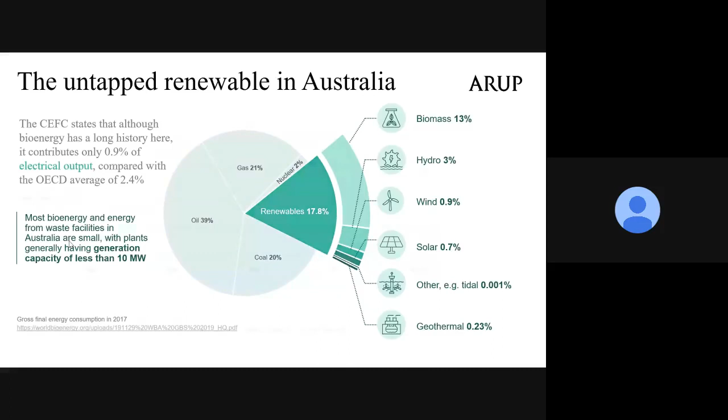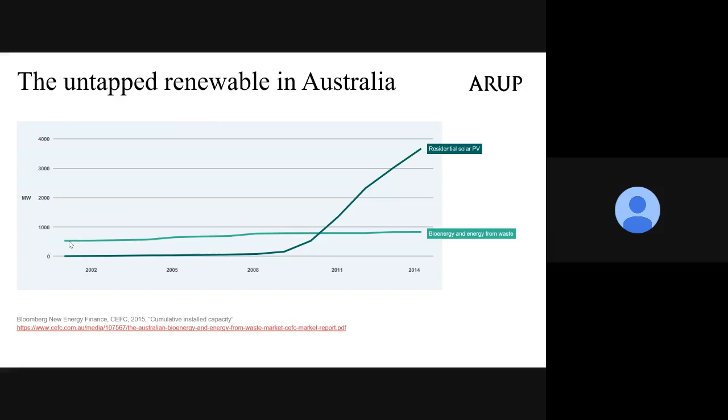It's interesting to note that the size and scale of bioenergy plants typically has been smaller in the Australian market, though there are some bigger ones coming up, which is quite exciting. If we look at bioenergy and energy from waste and compare it to solar PV, we can see solar's been on an amazing upward trajectory since around 2009, whereas bioenergy has been a very slow growing market in Australia, and there's a lot of opportunity for us to step into this untapped renewable.

Globally, we're seeing a lot of work, a lot of growth around the market. In 2017, for example, bioenergy accounted for 70% of the renewable energy consumption overseas. When we look at these countries and the size of bioenergy being produced for electricity, it's significant. And not only that, but that bioenergy is also being used for biomethane that's getting injected into the gas networks.

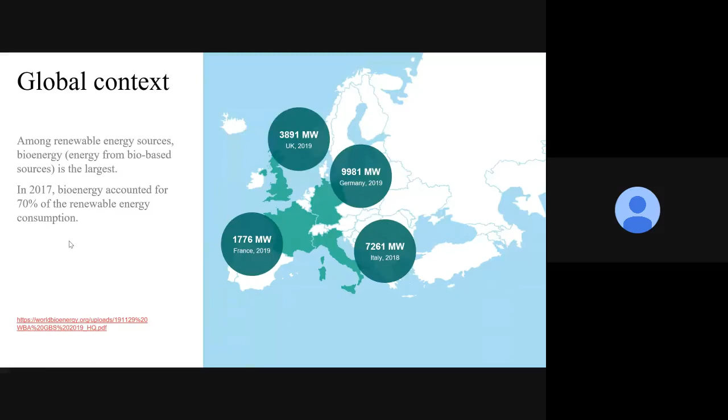Across Europe, there's over 1,000 operational plants operating in that way. I was going to touch a bit on the Italian market, but I'm sure our friend Kunal, who's speaking a bit later, will talk about some examples from Anaergia and work happening there. There's a lot of lessons we can learn from what's happening overseas, and there's a mature market, mature technologies, and we can tap into that to accelerate the growth of this market in Australia.

The second area globally I wanted to touch on was California, and there's a significant market being unlocked there, with a number of initiatives used to help unlock that. They're both federal and state incentives under two separate programs. The first is the Renewable Fuel Standard, which requires specific volumetric renewable fuel goals for the US. Secondly, the Low Carbon Fuel Standard, the LCFS. In California, they intend to reduce greenhouse gas impact of transportation fuels.

If you look at the size of the market and what's happening with bioenergy globally, there's 11 million people employed in the renewable energy industry, and bioenergy is the second largest employer of people globally. So globally, we're seeing bioenergy really take off, and I believe we're on the precipice of seeing that happen in the Australian market as well.

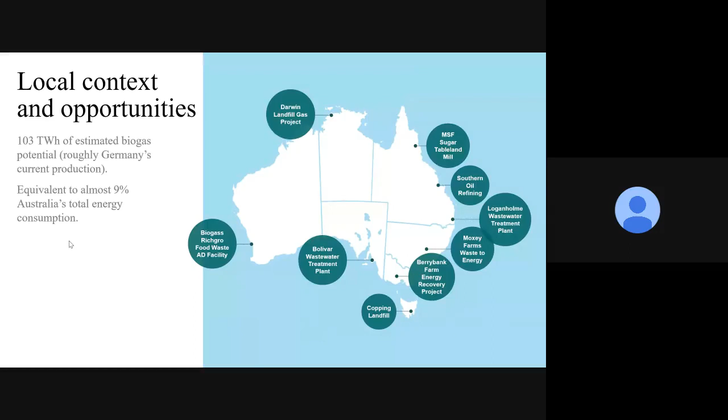In Australia, there's an estimated huge potential for biogas, roughly equivalent to Germany's current production, and Germany being one of the leaders in that space. There's a lot of different types of examples we can learn from around the Australian market. Obviously today we're focusing more on the water industry and applications in the water space, and you can see a couple of examples around Loganholme, Bolivar, for example. Fundamentally, that estimated opportunity is equivalent to almost 9% of Australia's total energy consumption.

I touched on what's happening globally before around not just bioenergy, but the gas opportunity. I wanted to highlight the fact that when we think about the water sector, there's the waste energy opportunity from our wastewater treatment plants. But I wanted to encourage all of us to continue to think holistically about cities and how do we bring together some of these opportunities.

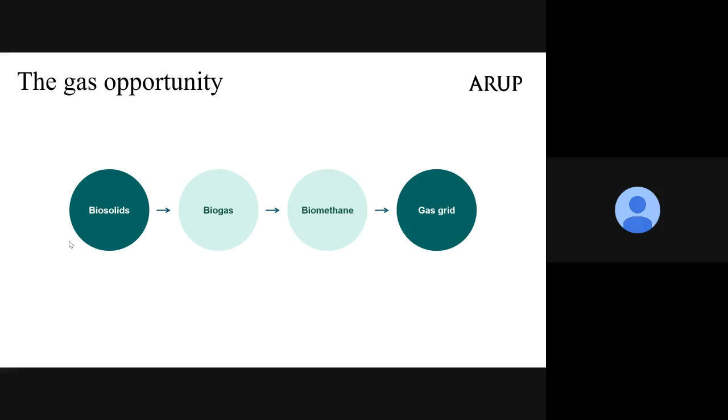In Sydney, for example, we have Sydney Water with significant scale of wastewater treatment plants. But then we've got Jemena with a gas network actively looking for players who can provide gas into their grid. As this quote from Jemena says, the Jemena gas network can act like a giant battery and bring renewable gas to more than 1.4 million customers for cooking, heating and hot water. So there's an opportunity for us as a water sector to collaborate with other utilities to capture this opportunity.

Not only that, but when we think about waste, it's not just about waste from the wastewater treatment plants, but there is a huge food waste problem in Australia, estimated to cost the Australian economy about 20 billion a year. You can see some stats around the volumes, but fundamentally 7.3 million tonnes of food wasted every year. Now imagine we worked as a water industry with the waste sector, with the electricity and gas sector, to look at how we bring together more of a circular economy approach to what we're doing.

Now, I'll touch on that a little bit later, but not only are we seeing this convergence of water, energy and waste, but we're also seeing an increased appetite from investors around the market. You can see many of the people who've dialed into the call today are investors. It's not just what can we do as a water sector, but it's how can we partner.

And there's been a real focus on responsible investment approaches, looking at social, environmental value and risk in terms of investments moving forward. Not only that, but Australian investors aren't just looking at the Australian market, they're looking globally. One of the examples Kunal will touch on, Rialto in California, was a collaboration with FSI, an Australian investor. So they're looking overseas and they want to invest into the bioenergy space in Australia too.

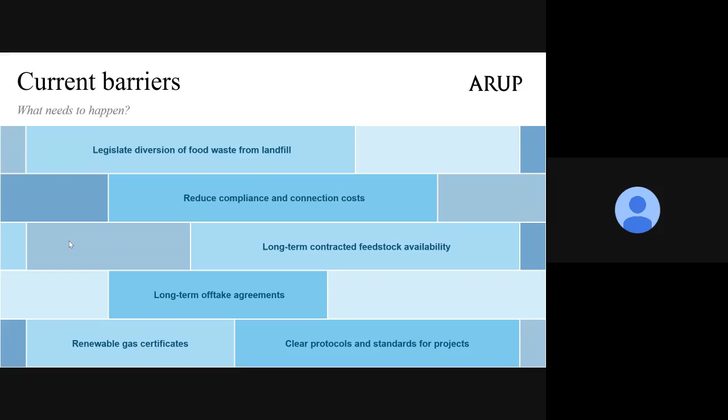So, current barriers - and some of this will be alluded to by our other presenters, so I won't harp on this for too long - but we're seeing the bioenergy roadmap unfold at the moment, and many of you will have contributed to that. But there's a number of barriers and lessons learned that we can apply from what's happening in California and Europe, to actually try and change legislation and regulation to complement changing thinking in the water sector in terms of partnering.

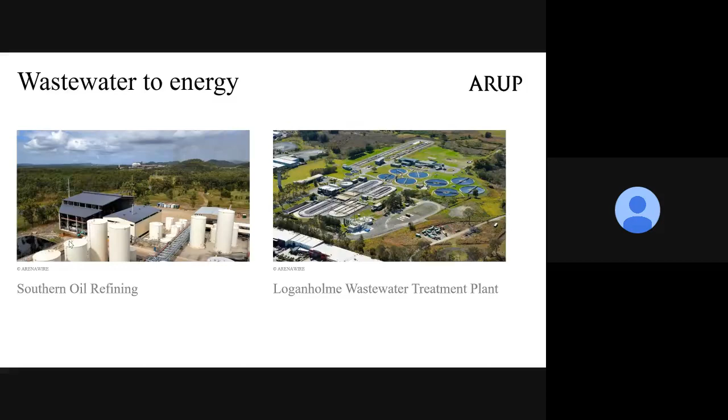We've got lots of talks on different projects today, so I'm not going to focus on these too much. What I will say is there's been some really significant movement in bioenergy in the industrial space, and I include water in that thinking. We've seen some fascinating work around capturing wastewater in lagoons and using that gas. But we still haven't really seen the market take off in the municipal sector, and I think that's going to be the next frontier over the next 1 to 3 years.

The size of the Australian water sector is significant, as you know. There's assets that we have, particularly when we look at wastewater, that's where a lot of the opportunity is to partner and use our wastewater assets more effectively, but also to partner with the gas networks and the waste sector.

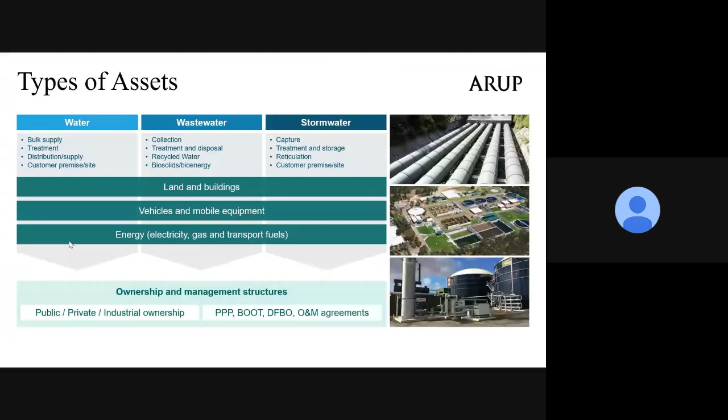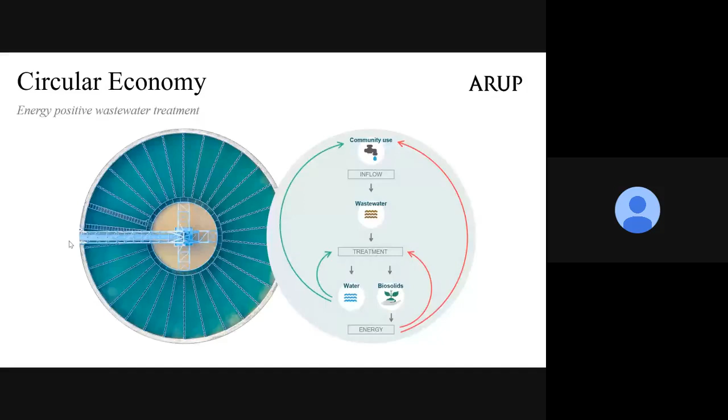So when we talk about that circular economy approach, we can think about bioenergy as energy positive wastewater treatment. ARUP's been doing some really interesting work with the Ellen MacArthur Foundation - if you haven't had a chance to look at it, those reports are available publicly on their website - around circular economy thinking. As part of that, we've been exploring how water can join that circular economy approach, how we can shift habits we've had in terms of how we run our sector, and how we operate in silos to an extent. In the past we've looked at gas separately, electricity separately, water and waste separately, and how do we think more holistically and capture that opportunity by thinking about the overall impact and opportunity we can have in cities.

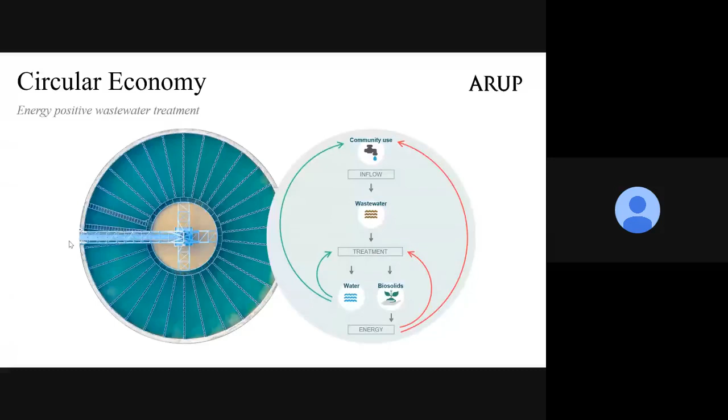When we look at that opportunity, there is a real synergy between what we do with our water and wastewater management systems and circular economy initiatives. And I think that's what I wanted to highlight today as we go through these presentations - to just think about what role we can play in responding to the environmental challenges we face within Australia, and how we can be part of the solution.

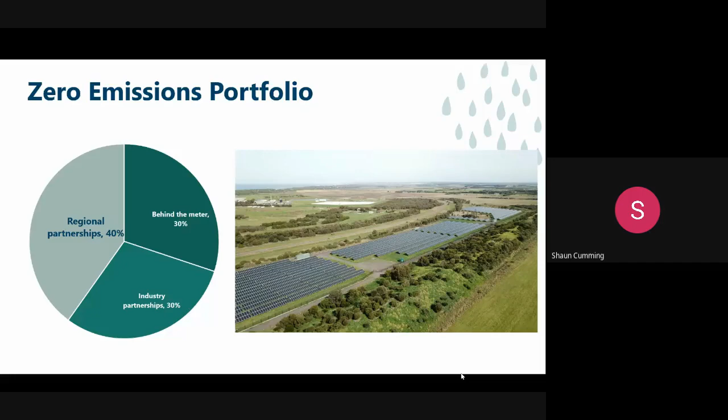And in doing so, we really tapped into the challenges that we're facing, our partner councils are facing, and also our major industrial trade waste customers are facing as well. And what we identified was 3 key themes that we were all facing.

So the first one was around addressing climate change by reducing emissions. The water industry is one of the largest emitters in the state government's profile in Victoria, and that's because water is heavy to move around and energy intensive to treat.

Councils: 34% of the general waste bin that everyone puts out each week is food organics. And when that breaks down in landfills, it emits methane, which is 25 times more potent than carbon dioxide in terms of a greenhouse gas.

In terms of our waste challenges, our population is increasing significantly in our region, and our waste is increasing at a rate greater than our population. Our landfills are filling, and waste security was a big challenge for industry as well, in terms of knowing long-term sustainable waste management solutions and also knowing the costs of those.

Energy and waste costs are also a big challenge in terms of maintaining affordable water bills, maintaining affordable rates, and we found it's impacting the global competitiveness of industries in our region. Landfill costs will more than double over the next 3 years, and over the last 5 years, gas and electricity costs have doubled. So that's really impacting the ability to compete on a global scale.

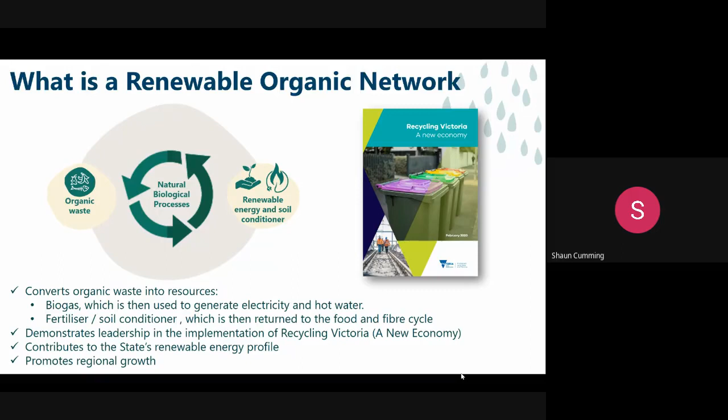And so with that in mind, our first Renewable Organics Network is actually underway in Colac. This is a partnership with Australian Lamb Company and Bulla Dairy Foods. So if you've eaten lamb from Coles, you've eaten lamb from the Australian Lamb Company, and they supply lamb to over 69 countries around the world. And I'm sure a lot of us have had a Bulla ice cream as well.

And what we've done is flipped our mindset on its head. We used to say to these customers, take out as much waste as you can and then send us the rest and we'll treat it. What we've said instead is: we'll provide a full waste solution for you, and while we do that, we'll create both energy and soil enhancer products. So they send their high strength waste to the Colac Water Reclamation Plant, where we create biogas that actually takes our plant completely off the grid and puts electricity back into the grid.

It also provides hot water back across the road to the Australian Lamb Company. The Australian Lamb Company currently use gas to heat up water for washdowns and the likes. This essentially offsets their gas use.

And it's a double loop, so the other thing is the solids that are left over get integrated into our biosolids facility, which thermally stabilises the solids and produces pellets that are reused around Australia - New South Wales, Victoria, South Australia, and even shipped across to Tasmania. That's gone from a product we used to have to store and try to find a home for, to a product now that we don't have any storage for. It's supplied to farms year round.

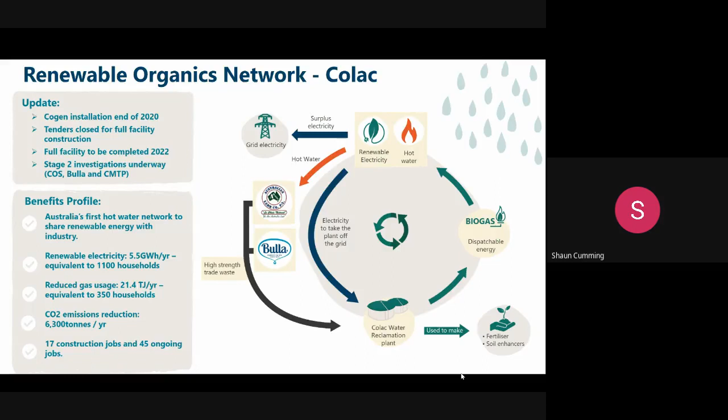And with that in place, we've now turned our minds to a regional-based initiative that's really partnering with the 6 councils within our region - being Wyndham, City of Geelong, Golden Plains, Surf Coast Shire and Colac Otway Shire - and looking at servicing a population of about 600,000 when you combine all those councils.

And we've looked at the waste in our region. There's about 150,000 tonnes a year of organic waste generated in our region, and a large percentage of that goes to landfill, which is an awesome opportunity to really upcycle that and create benefit from it.

So again, this facility is creating that double loop, like I mentioned before, with a strong focus on energy. But I think in this one, we're actually doing a lot of work looking at the soil enhancer, soil fertiliser opportunities, and how we really create a product that's differentiated as everyone moves towards a circular economy, and really has an edge against just normal compost.

We're looking at some innovative forms of that product, and also innovative sustainable additives to create what I call the super juice for all the farmers in our region.

This is under development at the moment. We're going through a 3-phase development process. We've identified all the waste in our region, looked at over 20 different combinations of opportunities, and we're narrowing in now on a preferred opportunity. We'll come to an idea of what the preferred process is by the end of this month, then move forward to taking that to a business case by the end of December. As we do that, there are a couple of things that are really beneficial to everyone working in this space.

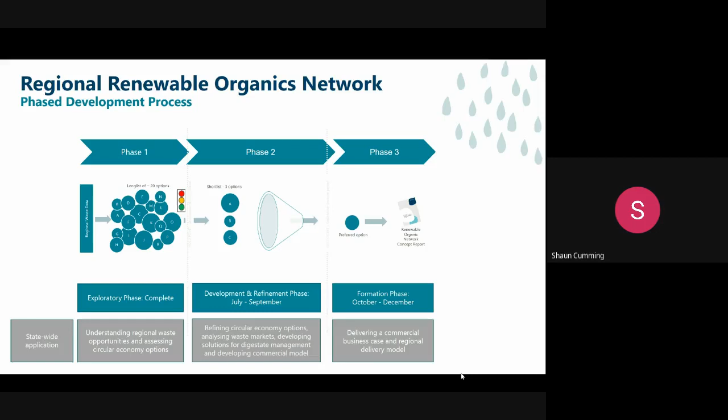We're doing a lot of work understanding what the gate fee market is doing. There's a lot of different drivers in terms of gate fee markets going forward, and it's one of the key areas that all of our partners are looking for some sort of idea or certainty on, to assess what value for money is in this space. We're doing a fair bit of work there, and also looking at where you put the digestate and how you really maximise the opportunity of the digestate.

Thank you for the opportunity to share what we're up to, and I look forward to any questions at the end. With that, I'll pass over to Kunal to have a chat.

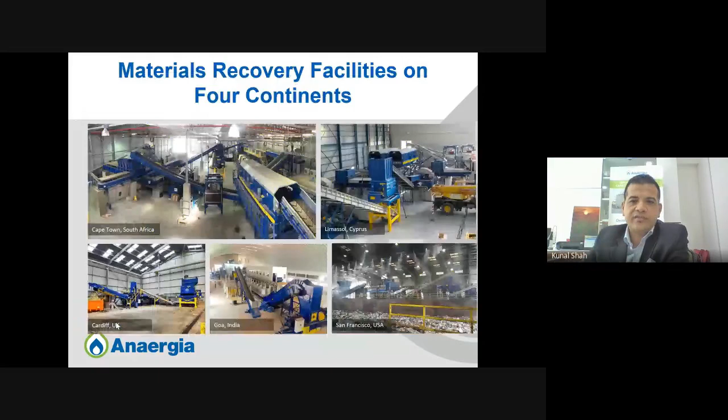Some examples of material recovery facilities - these are waste processing facilities. Over 1,600 digestion plants. Okay, a disclaimer here.

This presentation is not a sales pitch. This is presenting a concept - what we as a company have learned and observed over years across 4 continents, spending millions of dollars in R&D. All the concepts we are presenting are proven - they are not lab scale, and not all the solutions fit all. They are tailor-made for each opportunity.

So what is the current global approach to waste and wastewater management at cities and councils? This is the current approach - every city has a waste management department, and I can tell you from the limited exposure I have from this part of the world, and wastewater treatment plants...

Now, in certain countries, both these agencies are quite intertwined, but in many cases there's a Great Wall of China between the departments. What happens is that the waste from the transfer station goes to a landfill, and the wastewater treatment plant treats the wastewater, in some cases recycling it, in some cases generating power. We all know that if it's only from the parasitic power generation from the sludge, you'd generate about 30, 40, 50%, depending on the situation and quality of the wastewater. But in general, the wastewater treatment plant is a net energy importer in most cases. And the biosolids are usually sent to the same landfill, or in some countries used as a digestate.

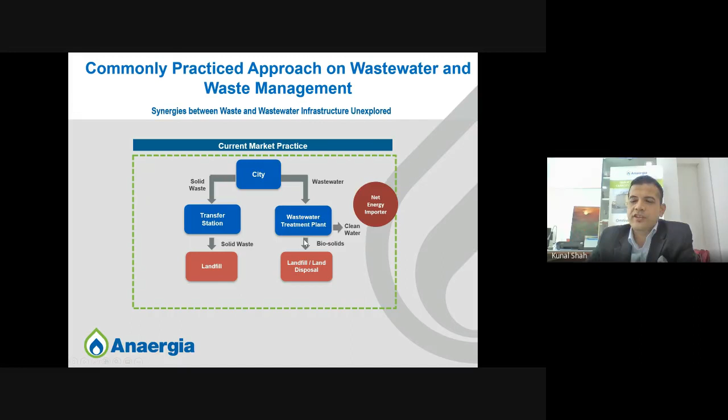So in this approach, the synergies between the waste infrastructure and the wastewater infrastructure are unexplored. This is what I want to present to you: there is an opportunity to maximize resource recovery by leveraging the synergies between these two sectors. That's how we suggest it, and that's how it's been done in various cities in the world.

The same city has transfer stations, and the same city has wastewater treatment plants. I'd like to bring your attention to the point where there are two star marks. There is an enabling technology which helps achieve this, but more than technology, it is also about concept building, and that's why the role of a developer and an investor plays a very critical role in developing these facilities.

So what happens is that at an existing transfer station, with the help of a technology, which is Anaergia's OREX technology, you extract organics from mixed waste. Those organics, as you'll see in later slides, are polished and sent to a sewage treatment plant, either existing or new, or a merchant facility, where it is co-digested with sewage sludge. Because of food waste and the BMPs, what we call the potential of generating power, the same wastewater treatment plant has an ability to be converted into a net energy exporter. Because of the high heat available, you can actually have an enhanced chance of converting the biosolids to either dry them or make biochar out of it.

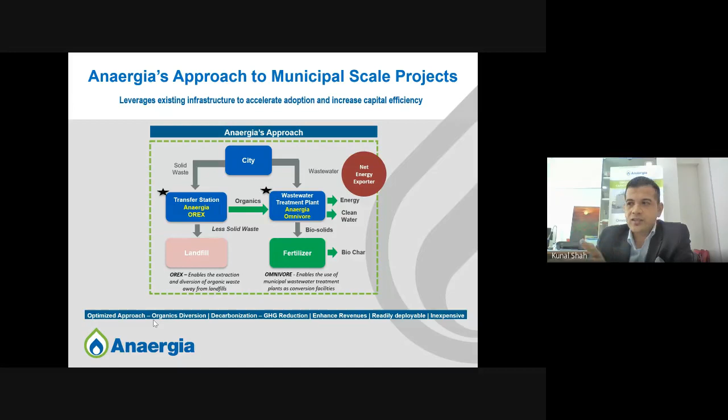So the one piece of technology that's important here is the OREX. As we all know, at an existing wastewater treatment plant, when the sludge is being digested, it's usually low solids digestion. When food waste is brought in, the same digesters have to be converted or upgraded to high solids digestion. So the second piece of technology is what we call the Omnivore, which is a high solids technology. Now, the benefit of this approach, in our view and experience from various parts of the world, is it's an optimized approach for organics diversion, nice decarbonization or GHG reduction, and enhanced revenues for the utility. It's readily deployable because the infrastructure exists, especially at the wastewater treatment plant, and it's an inexpensive approach.

So now I delve into what are the key technologies for unlocking organics feedstock and enabling co-digestion. Have a look at this slide, where we've tried to connect the dots. As Dan mentioned, and Sean mentioned, there are some very interesting utilities in Australia, like Barwon Water, Yarra Valley Water, Sydney Water, and some utilities in Western Australia, which do some form of co-digestion. But that co-digestion usually depends on cleaner organics, or organics from industrial and food processing industries, which are generally liquid and can be pumped into a digester. So the retrofitted digesters are very limited.

What we've observed is that over a period of time, the competition for this feedstock increases. The reliability of this feedstock is up and down, and there is an opportunity to unlock a very perennial source of organics, and that is the organics from commercial waste or residential waste. Yes, guys, this is happening. We're running facilities where we extract organics from municipal solid waste at either an existing transfer station.

The important point here is two pieces of processes, which is extraction and polishing. When you extract organics from MSW, you will still have plastics, glasses, and grit, which needs to be further polished in order to put it into an existing sewage treatment plant. So once this is done at an existing transfer station, the organic pulp, at various levels of solids, is then sent to an existing wastewater treatment plant, a new wastewater treatment plant, or a merchant facility, where it can be co-digested with a high solids anaerobic digestion facility, generating more power or renewable natural gas.

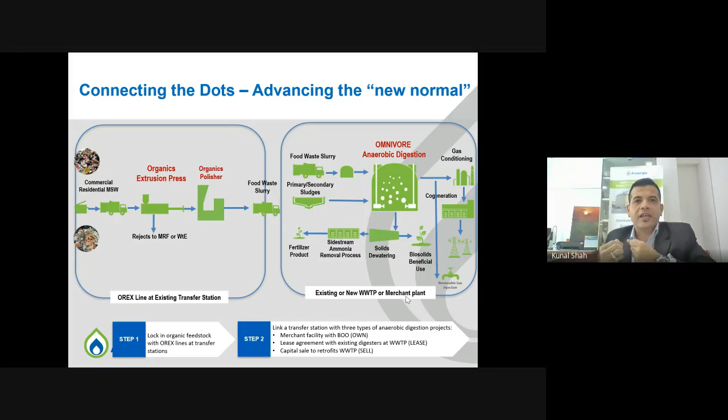So step one is to lock in organic feedstock with a process which can extract organics from MSW. Step two is to either transfer these organics to an existing sewage treatment plant, where you upgrade the existing digester with high solids digestion technology, or if it's a new digestion facility, you build this in, or you can set it up as a merchant facility where you invest, build this facility, and sell power.

So the first piece of the puzzle was extracting organics, and this is a machine which we've developed. Now we have a dozen plants working on this technology, and a half a dozen under construction, where we put this on an existing transfer station, or it could be co-located in a wastewater treatment plant if there is space and regulations allow extracting organics.

In simple layman's language, it's like a garlic press or a sugarcane press, where you apply a lot of pressure on mixed waste, and the putrescible part of the organics extrudes out of the mixed waste, and that goes into an organic polishing system. So this is the first piece of the puzzle.

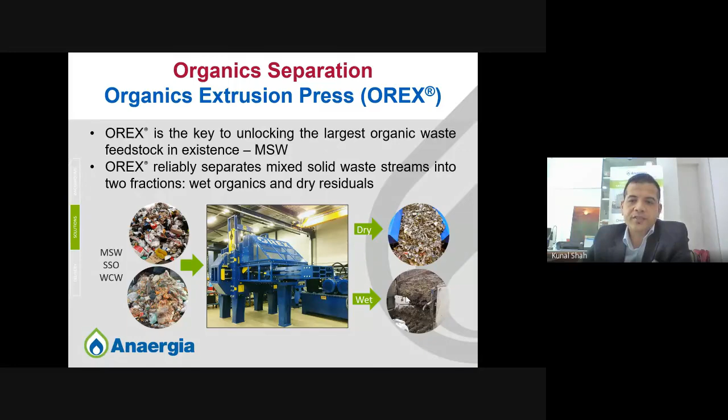The second is high solids digestion. Most wastewater treatment plants have existing digesters which are low solids, because the sludge comes at a low solids content. When you bring in organics extracted from MSW or high solids food waste, you have to upgrade the existing digester, and thankfully there is a process which can actually upgrade an existing digester in the same concrete volume and enhance it by two-thirds. We have a process which has been established for this.

It's called the Omnivore process, which converts low solids digestion into high solids digestion.

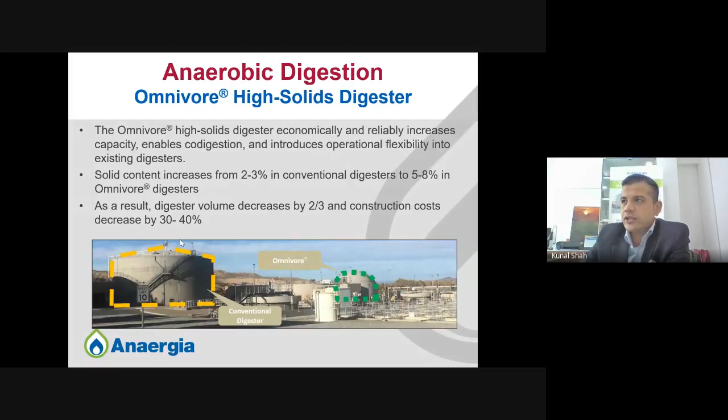Interesting part, why should utilities look at it? The topic of the webinar is also why utilities should be encouraged to look at this kind of synergistic approach, and I've tried to lay down a couple of points on this. I believe there is a genuine approach here - we saw a couple of utilities on this call, a couple of utilities in Australia which have an attitude towards building these kinds of facilities. But what we've observed in various places is how to lock that feedstock in order to justify a capex investment. Reliability is a key word in this COVID, post-COVID world, and this approach is a way to lock in feedstock which guarantees availability and modest tipping fees.

An interesting topic, not technological but a bit behavioral: we believe that source segregation of waste, which is a prevalent practice we've seen, is not necessary. If it's going to be separated at home and then dumped into the same landfill, you might as well not separate it at home, because the cost of collection, preparation, and transportation is much higher than for mixed waste. What we want to do, and what we've demonstrated, is that mixed waste can be collected at a cheaper cost and organics can be extracted from that.

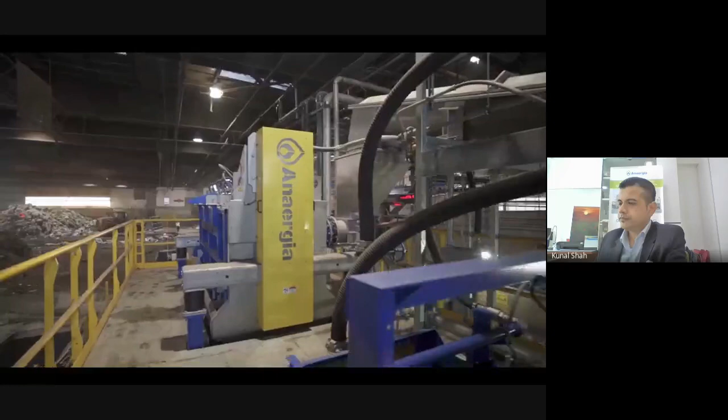We are trying to divert all waste, but the most important is organic waste because it generates so much methane. We have tremendous greenhouse gas footprint from that. Anaergia has technology called the Organics Extrusion Press that has the ability to process solid waste of any contamination level.

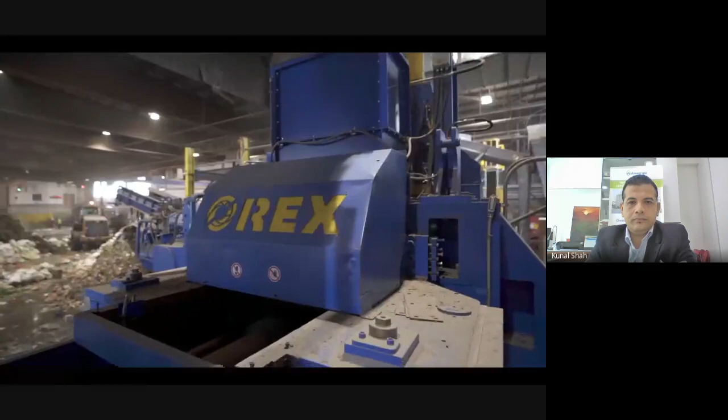The first step in the Anaergia process is to shred the waste material. After shredding, the material goes to the OREX press. This unique machine applies pressure to the waste material. The liquid fraction of the waste is extracted in this process. The last step is to clean up the liquid fraction and remove small bits of contamination.

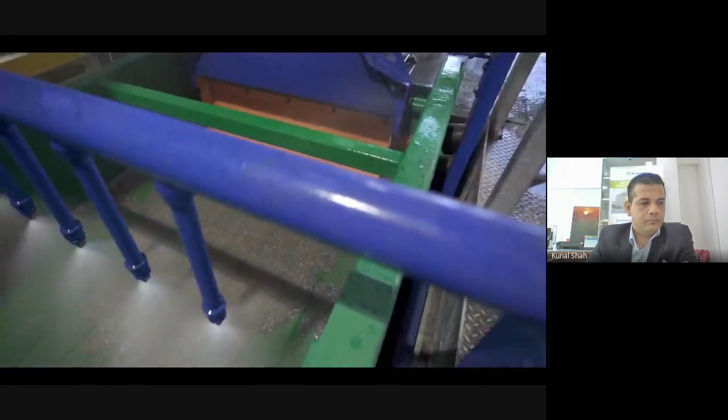Clean organic slurry is transported to our local wastewater treatment plants, where it's converted to energy through anaerobic digestion. Converting organic waste to energy actually provides the lowest carbon transportation fuels of any kind. In fact, it can be many times lower carbon than an electric vehicle running 100% on renewable power. It creates fertilizer that can be used to improve topsoil, which is also a desperate environmental need.

With the digester technology, we're able to take something that we used to have to ship off and turn it into an asset by using it to generate electricity and then obviously avoid energy costs moving forward.

1,300 other cities have declared climate emergencies. The leadership isn't being shown at the federal level. It's critical to work around that by having cities provide the leadership. So we need 100 or 200 more of these projects to meet the state's landfill waste diversion goals, and Anaergia is leading the way with that effort.

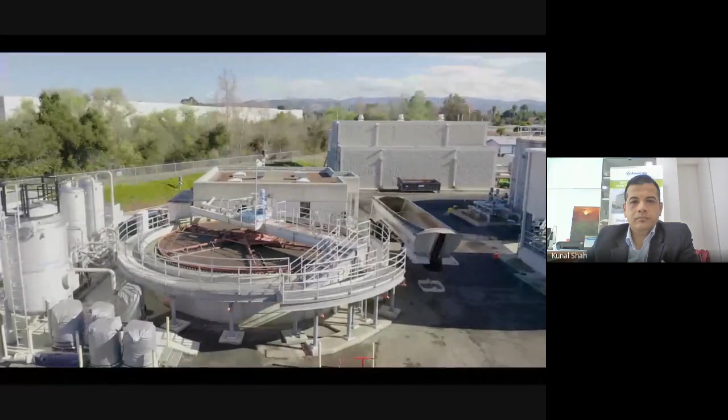We're in an era now where looking at organics recycling is really exciting. Our mission is to convert waste into useful resources, protect the environment, and sustain life for generations to come. To leave a cleaner world for my kids in the next generation. You get to do something at the end of the day you can feel good about. Everyone has to believe that climate change is real. It helps you focus on areas where you can individually contribute. Come join us in deploying organics recycling solutions across the state of California.

Anaergia was founded in...

I will share my screen again, and we're actually coming to the end of most of the presentation. So I hope that was a nice small movie time.

That video had almost 5 different utilities from the state of California, which are looking at organics diversion and which are looking at GHG impact goals. And this is the reason.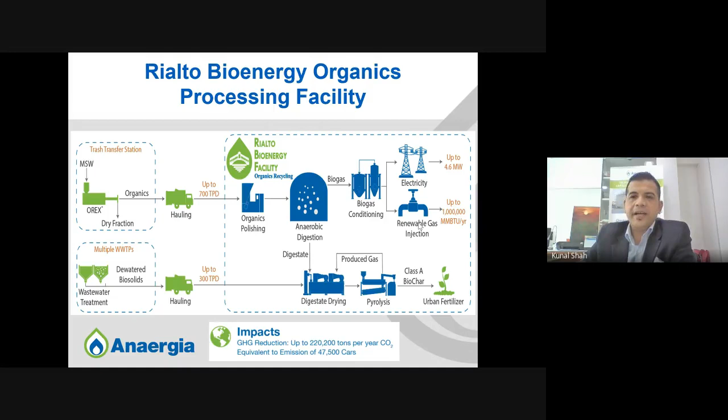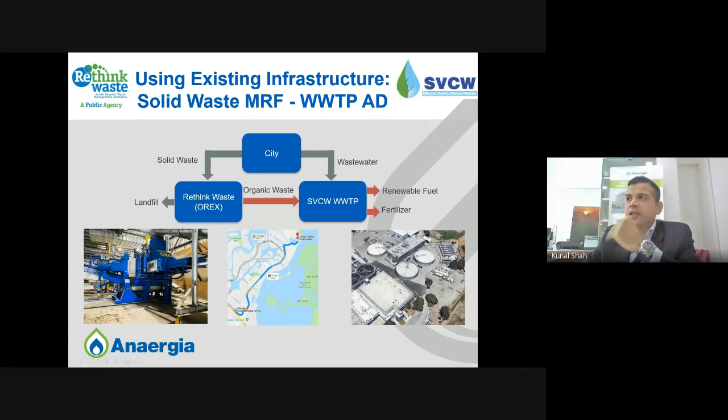This facility is very interesting. This transfer station would not only send organics to one sewage treatment plant, but to a couple of sewage treatment plants. This is in the Silicon Valley Clean Water. This facility is an example of how a utility - this is an EPC project, not an investment project - designed and thought about co-digestion from the beginning in the tender process. Earlier, they were going to import about 1 megawatt worth of electricity. With co-digestion, they are now going to export 3 megawatts of electricity to the grid, and of course, recycle wastewater.

I would not do justice if I did not mention to everybody on the call this interesting project in the country where I live, and I'm very proud of this. So we talked about the China wall between the agencies. I think Singapore is one of the world's leading countries in terms of managing waste and managing wastewater. We all know about the National Environment Agency and the Public Utilities Board.

If you haven't heard about this facility, it will come out soon. I'm happy to Google it down, but this is going to be one of its kind, the world's largest integrated waste management facility, where it's going to take different streams of waste in a co-located waste management facility, which involves food waste pre-treatment, a material recovery facility, and a waste-to-energy incineration plant. So different types of waste - incinerable waste, household waste, and food waste - go to what we call the integrated waste management part of the facility, which extracts the organics from food waste.

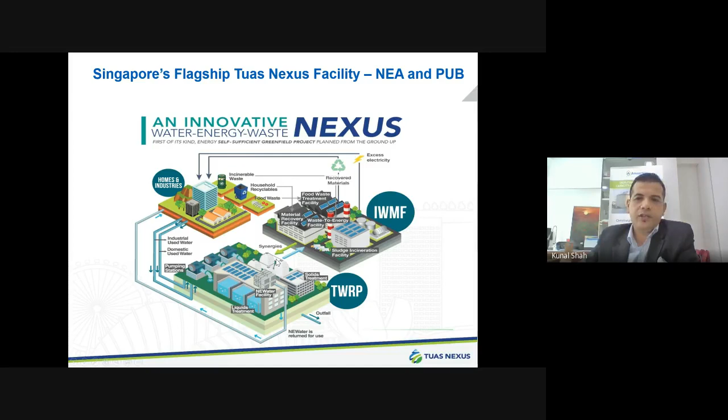We had an amazing opportunity to be part of this facility in a small way. Singapore does something very interesting - at such a large scale facility, they wanted to set up a pioneering large-scale demonstration plant. I don't call it a pilot plant because it's really a demonstration plant - 40 tons capacity, 20 tons food waste, and 20 tons waste activated sludge. This was set up in 2016 just to study how the co-digestion would work as an input to this massive multi-billion-dollar facility.

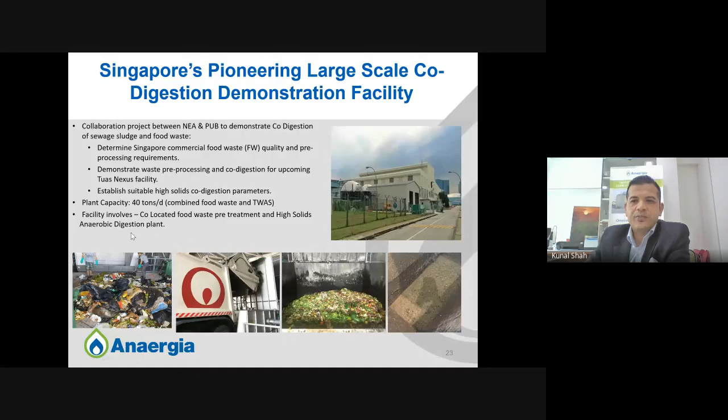So this is an opportunity. Again, a lot has been written on this. I would like to summarize that I think there is an interesting synergy which needs to be leveraged. It will take a lot of people on this call - investors, developers, technology providers, equipment providers, consultants, utilities, and waste companies - to come together and bring this synergy, which is really cost effective if you look at the whole picture, and readily deployable. I think it's a nice return on the taxpayers' money. It's a golden opportunity for utilities to decarbonize and help divert organic waste from the landfill.

In my way, I call it being future ready. This is coming today or tomorrow. Some countries are following it. It is coming, and I think Australia has that leading front in many ways. For investors on the call, we all believe, and Michael knows this as an investor himself, that the GHG potential of co-digestion or a waste biogas plant is multiple times that of any other source of GHG reduction renewable energy project.

So from the ESG impact perspective, this is a very interesting point. And last but not least, I think wastewater plants, we really view this as an organics resource recovery center.

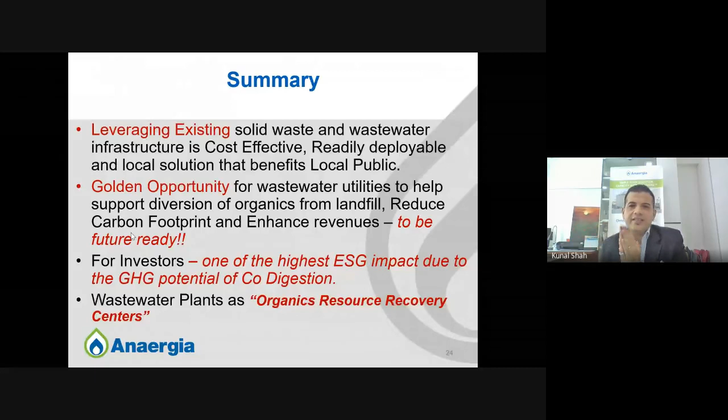That's interesting technology there on that machine. Michael, can you give me a thumbs up? Is my voice coming through okay? Great, I'll just start my presentation. Mike, is that screen coming through on its own? Yep, it's coming now. Thank you.

So yeah, I'll be presenting on the project that I'm managing with Yarra Valley Water. We are very excited to be embarking on our second waste-to-energy facility.

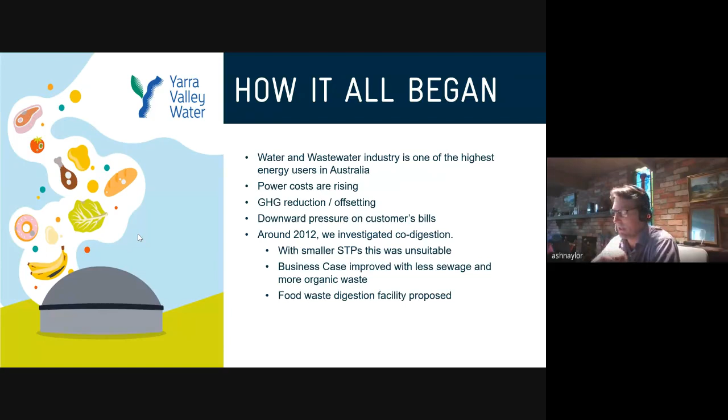Around 2011 or 2012, we started investigating co-digestion at our sewage treatment plants, but we found that with our smaller sewage treatment plants this was not particularly suitable, because our treatment plants are dotted around small towns often, with fairly small sewage flows, like around 4 or so megalitres. With the ones that had a suitable amount of land for a waste-to-energy facility, I found the business case improved with less sewage and more organic waste, so we ended up landing on food waste digestion.

We built the facility in 2017, and we partnered with the company Aquatec Maxcon to deliver and operate it. The two generators there put about a megawatt in capacity, and we receive about 33,000 tonnes per year of greasy waste, paunch, and vegetable and fruit and veg market waste from Melbourne's food markets nearby, along with food processing waste.

That's co-located and powers the sewage treatment plant next door, completely treated, completely powering that plant. The remaining about 75% or so, depending on what's going on at the sewage treatment plant, of the power is injected into the grid, unless there's a peak demand day in which case we can run the treatment plant on generator and get some more financial benefits from the peak power prices.

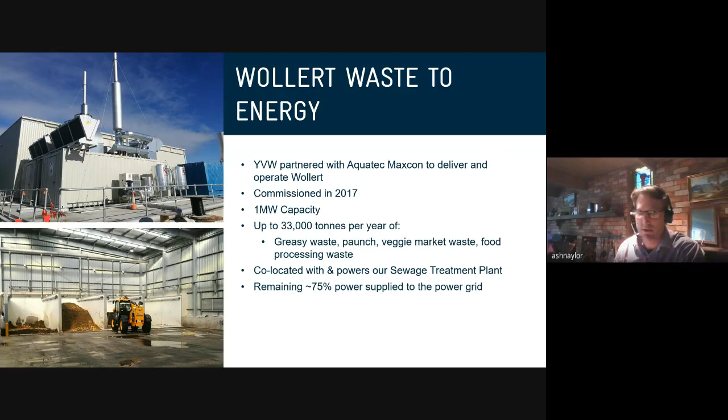Now, some of our learnings from that project were around the waste. Knowing what's available and understanding your waste market is critical to the success, especially with the right waste. Make sure that the right waste is available at the appropriate quality, and that the design of the digester is appropriate for the waste profile.

The other thing we learnt was a bit of a mindset change as well: that it's primarily a waste receival facility that produces power, rather than an electricity generator. A lot of your effort goes into waste management and receival, and waste is the biggest contributor with the gate fees that we receive. Yarra Valley Water receives the gate fee and then supplies it to the operator, and of course then there's balancing the revenue input as well. What you receive impacts the operations, biogas production, and the health of the digesters, so you have to make sure that you balance that waste revenue and the operation of the facility.

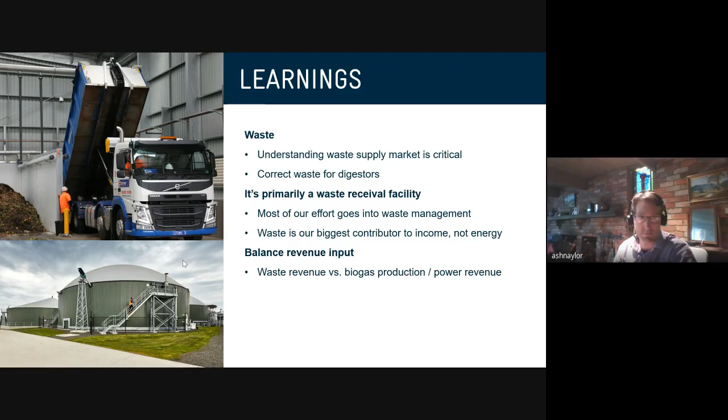So we decided to expand on the success of this, and during the years, some of our drivers were also updated. The Victorian State Government had introduced a Climate Change Act to achieve zero emissions by 2050, and in 2019 they introduced the Circular Economy Policy, which influences our targets. By 2025 we're targeting 100% power production.

The waste to energy project is part of a suite of projects, including solar panels at some of our treatment plants and our office car park, along with the solar installation in country Victoria that Sean mentioned, and another future solar plant at one of our treatment plants, Lagoons.

There was a treatment plant on that land, and we could really benefit from the behind-the-meter savings on network charges. It also expands our catchment area for waste, and we won't be cannibalising the catchment area for waste on the Wollert facility.

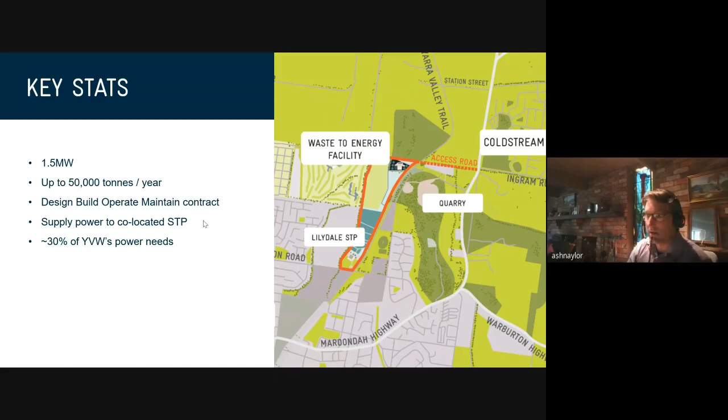Now, our challenges for the facility - there's the usual community ones we've highlighted, but we're managing odours, traffic and visual amenity through a strategic community engagement program, and also managing the team. There was a former composting facility with open windrows on the site, so there is some memory in the community about that, and we have to respond to that accordingly.

The other challenge is digestate. Regulations generally see digestate as a waste rather than a resource, and it's a new potential product in Australia, particularly for reuse in agriculture. This is pretty close to a heavy horticulture area in the Yarra Valley where there's a lot of strawberries and fruit trees, so we'd really like to make use of that and develop another revenue stream.

We did a research paper presented at Wastewater that I suggest you have a look at. We're also doing some work with the EPA at the moment to do some trials with digestate, and working with Sustainability Victoria and discussing with other water authorities to see if we can encourage the development of a regulatory framework and therefore a digestate market.

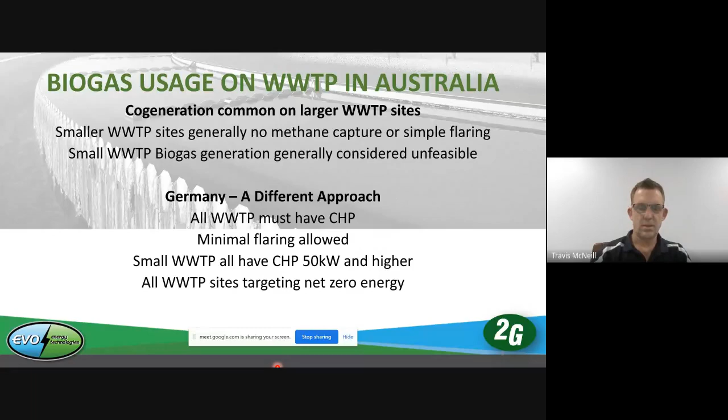If we look at the solutions we're able to provide to the market, the main one we're working with is 2G Cogeneration. It's a German company, nearly 25 years old now, so a very large company with over 800 staff. It's a public company listed in Frankfurt on the stock exchange, and they're in the top 3 CHP suppliers in Germany.

2G focus on gaseous fuels, so we look at natural gas, biogas, landfill gas, and obviously sewage gas. 2G's engine range goes from 75 to 450 kilowatt, which is their own engine. When we look at larger projects for cogeneration, we would be packaging Jenbacher, MWM, or MTU engines into those solutions—that's really a choice of what the client may request in terms of their desired engine and what they may already have.

The engines are class leaders in terms of efficiency and reliability. Most of the engines are at around 42.5% electrical efficiency, which means a much higher output per cubic metre of biogas. The service intervals are over 2,000 hours between services, and reliability is a key factor in the equipment itself.

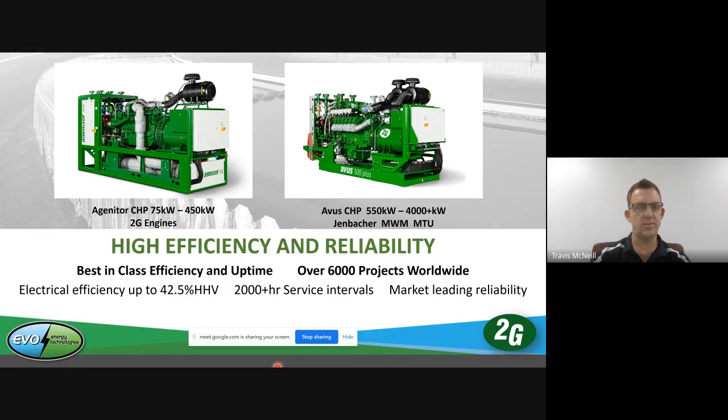2G also have hydrogen-ready engines, so we have the capability to either install a biogas CHP now and upgrade to hydrogen later. As hydrogen production in Australia starts to become more feasible, with a lot of projects and talk about this at the moment, we can switch those engines across to run on a combination of biogas and hydrogen. The beauty of hydrogen is that it's a zero emission fuel, so much more attractive.

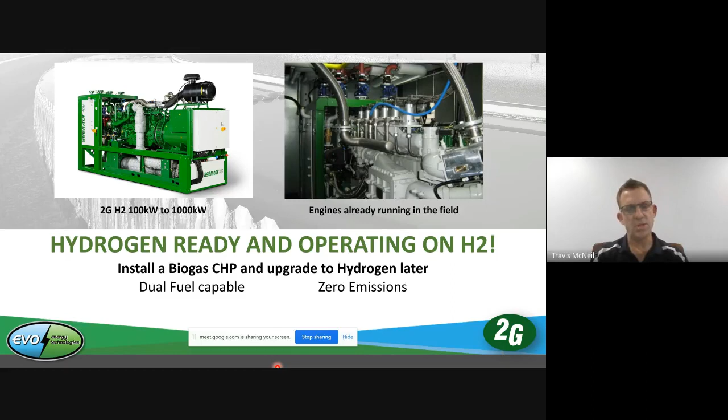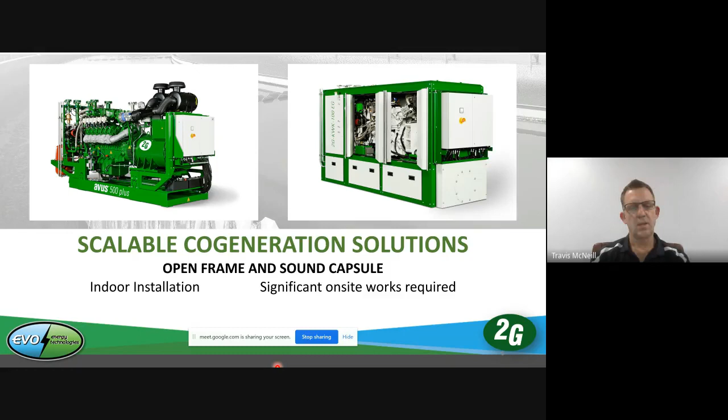There are a number of ways we can deliver the projects. One is indoor installations—the open frame, which is just a bare engine into a machine house. The sound capsule is another option, again usually an indoor installation but sound attenuated. But the preferred solution for delivery of biogas cogeneration would be the containerized solution, where we can package anything from 50 kilowatts up to 2 megawatt into a container.

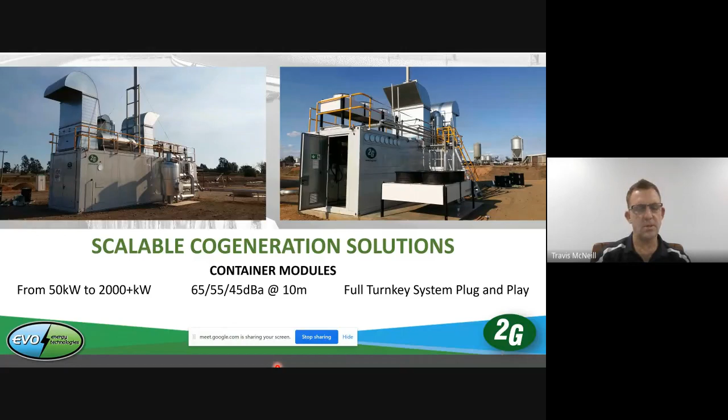2G have a variety of different sound output containers, from 65 dBA at 10 meters down to 45. So if you've got an installation in a location with nearby neighbours, we can provide a solution to meet that requirement. The cogeneration solutions in containers are very much turnkey, plug and play, so very rapid deployment—we can get them installed and operational within probably a week, much quicker than doing a machine house installation.

With 2G's containerized solutions, they also have complete biogas treatment, including gas drying and reheating as part of the package. Generally speaking, biogas is very humid, fully saturated with water, and has a lot of contaminants. The drying and reheating package will dry the biogas and provide very low humidity so it can be delivered to the carbon scrubbing system.

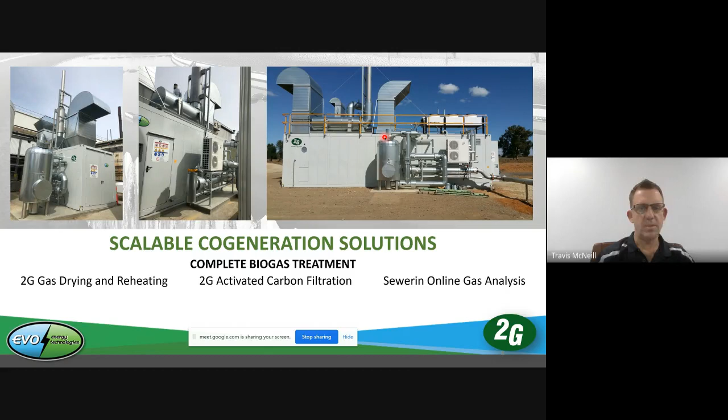We also supply a more complete solution in terms of the equipment provided, anything from gas delivery, biological desulfurization, flares, biogas storage, and other technologies, which I'll run into in a second.

Biological desulfurization is a solution for a lot of wastewater treatment plants, particularly if they have high organic matter, such as a red meat processor or an abattoir. Often the hydrogen sulfide in the biogas is extremely high, which can lead to very high OPEX costs in terms of changing the activated carbon. Biological desulfurization plants remove the vast bulk of the H2S and are very low cost to run, requiring only a little water, some fertilizer, and a minor electrical load.

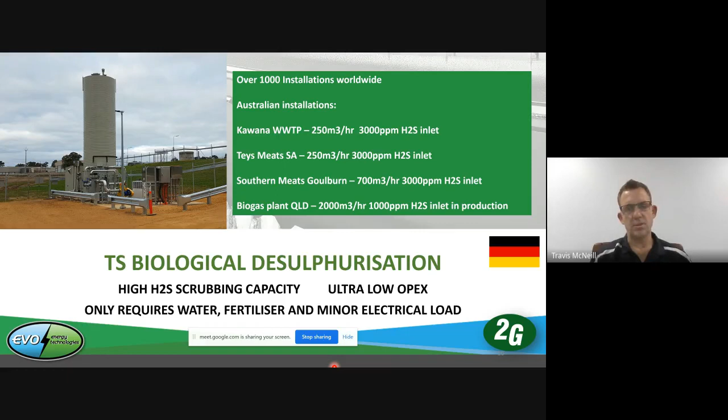The installations we've currently got in place here in Australia include one on the Kawana Wastewater Treatment Plant, one at Teys Meats in their Naracoorte facility, and one at Southern Meats in Goulburn. We've also got an upcoming project in Queensland for a large site there. All of those biological desulfurization units are actually removing H2S from about 3,000 ppm down to below 100 ppm, which means they're able to be run into the engine without any further treatment.

The ability to store your gas and then generate when power prices are higher is obviously a big advantage. If you look at the German market, a lot of the biogas plants in Germany, whether on wastewater or otherwise, have traditionally been running as a continuous operation, so they might have a 1 megawatt engine running 24 hours a day, delivering their electricity into the national grid that way.

Over time that has changed, and now a lot of those biogas plants are looking at putting in more generation. They may go from 1 megawatt to 3 megawatts of power generation capacity, but deliver that into the grid in a much shorter period of time, so they can take advantage of power prices when they are higher.

The other solution we're able to provide to the market is biomethane plants from ETW. There's obviously a lot of discussion about this technology and capability at the moment, and it's fairly common for these plants to be up and running in Europe now. There's nothing in Australia at this point, so we're certainly excited to be involved in the market as biomethane becomes more readily accepted, and hopefully some projects get delivered.

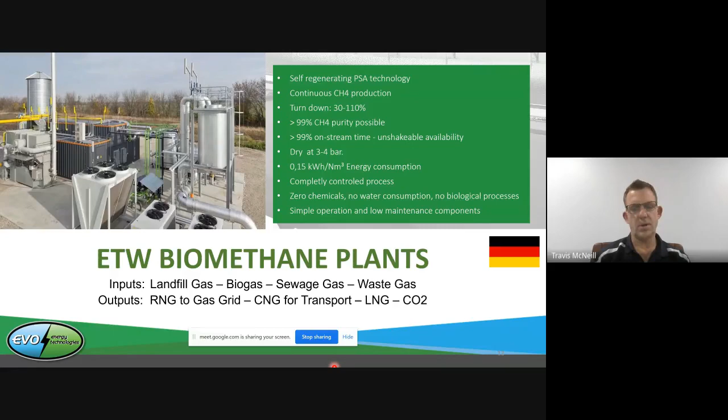Travis, this is Michael. Are you close to winding up? Because I'm conscious of time here. Sorry, yes, okay, certainly. Sorry.

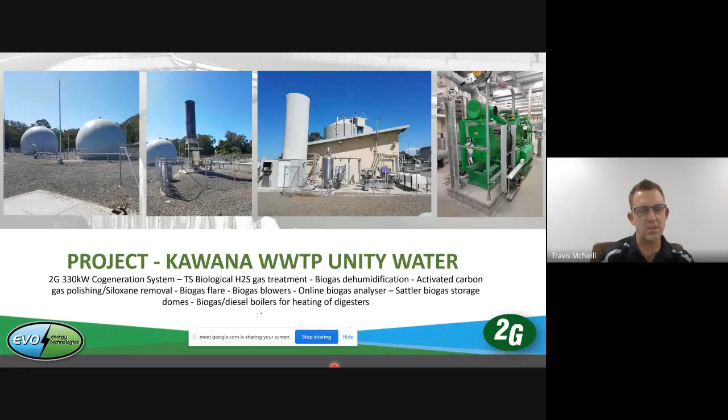If we have a look at the projects we've currently got, we were involved with Kawana Wastewater, Kawana Unity Water here, where we supplied a lot of the equipment. We didn't do the domes, but we did the engines, the biological gas treatment, active carbon, the flare, and the blowers. Mount Martha Wastewater Treatment Plant for Southeast Water, that's the engine actually on site, delivered in March of this year.

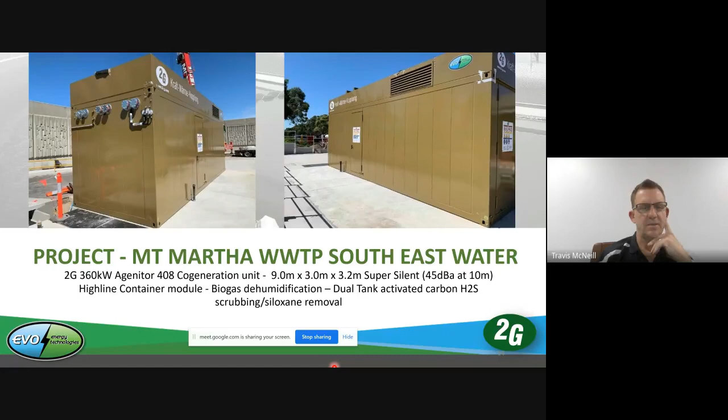Upcoming projects for us, we're supplying a 360 kilowatt cogeneration unit for Barwon Water's Colac project that Sean spoke about, 900 kilowatts of landfill gas generator at Latrobe. For Southeast Water, we have two 550 kilowatt engines going in on the Boneo wastewater treatment plant. We've got another project for Gold Coast Water at Coombabah wastewater treatment plant, which is 550 kilowatts, and a very large 4 megawatt biogas project up here in Queensland with gas treatment and biological scrubber.

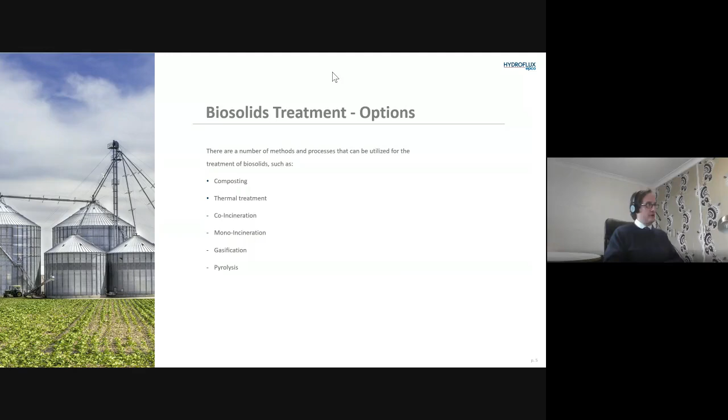Biosolids disposal is quite a significant part of a water authority's cost in terms of sewage treatment. Very quickly, biosolids treatment, there's quite a few processes there on the market, from composting through to various forms of thermal treatment, which includes co-incineration, mono-incineration, gasification, and pyrolysis.

So specifically sludge to energy, this is actually a mono-incineration process that Huber and WTE have implemented in the European market. The mono-incineration refers to the fact that only biosolids from sewage treatment is used as the feedstock. And this enables the recovery of a phosphate-rich ash that can be beneficially reused.

There are 5 major process elements to the sludge to energy process. The first is the biosolids receival area. We then have a drying facility, which is required to remove water and increase the calorific value of the sludge to enable auto combustion to occur.

We then have the fluid bed furnace where the combustion is realised, and associated with that is heat and power recovery via heat exchangers and steam turbines. And of course, there's a comprehensive air emissions treatment facility, which typically consists of a multi-stage dry flue gas cleaning process. The core of the process, which is the fluid bed furnace, is actually a specifically built technology by Sludge to Energy.

It's not a commercially available one. They've actually developed it for this application.

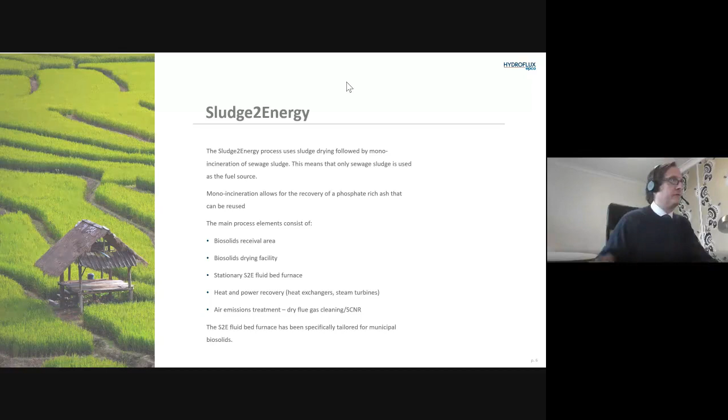And then we have the furnace itself, followed by either a hot water boiler or steam boiler, and that's dictated by the size. So up to 3 megawatt, you're looking at a hot water boiler, and above that, up to 15 megawatt, you're looking at a steam boiler. We then have the associated flue gas cleaning, which is a multi-stage process with the emissions discharge.

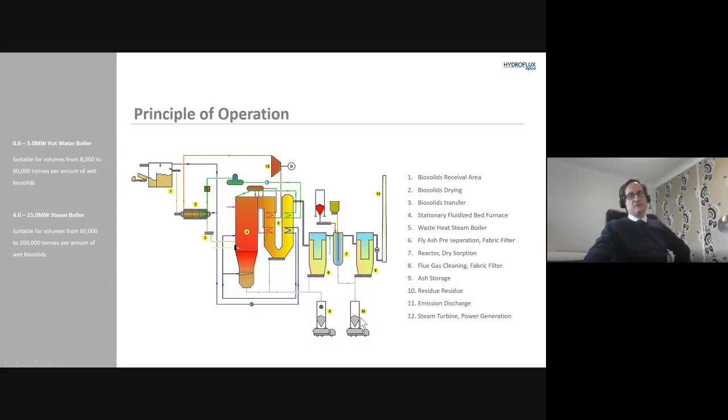Down the bottom here, there are the two byproducts, and those byproducts are essentially less than 10% of the input. So we are talking about 90% reduction here of the volumes. The bulk of that is actually the phosphate-rich ash, and then you have a small amount of residue, which is produced from the flue gas cleaning process.

Straubing in the south of Germany is an operating reference. It's been going since 2007, 2008. Lots of experience gained from this site. And the project has proven to be self-sufficient with the energy that is recovered, driving the sludge to energy process with a 0.6 megawatt output, and that includes providing thermal energy to run the drying system.

So based on that site and other sites that S2E have built, some of the outcomes are that the process has proven to be self-sufficient with no reliance on external energy. Phosphate has been recovered from these processes and even enriched using newer processes that have been developed and beneficially reused. There's a consistent 90% reduction in biosolids volumes, and the advanced odour treatment systems have complied with quite stringent air quality regulations.

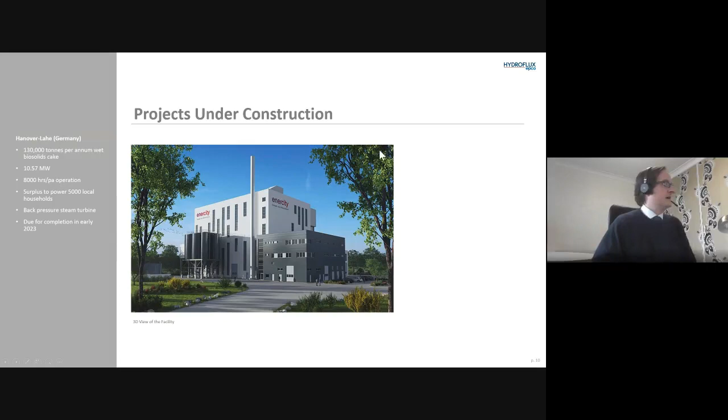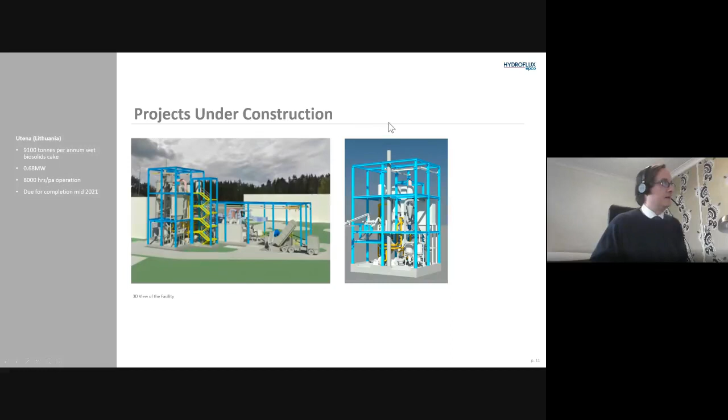So sludge to energy has been around for 10 years. It does assist water utilities in securing a long-term strategy in terms of disposal of biosolids. I believe it's something that the Australian and New Zealand water authorities could review to help them meet their sustainability targets. It does unlock the energy potential of biosolids, and it can provide energy neutral sewage treatment and also provide a surplus energy demand for domestic use. Performance has been well proven with 10 years of operating experience, and certainly a very high level of reliability and regulatory compliance. So that's my introduction into sludge to energy.